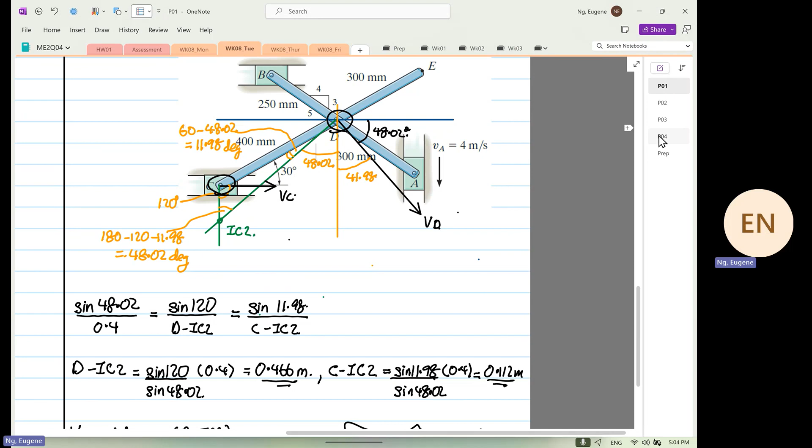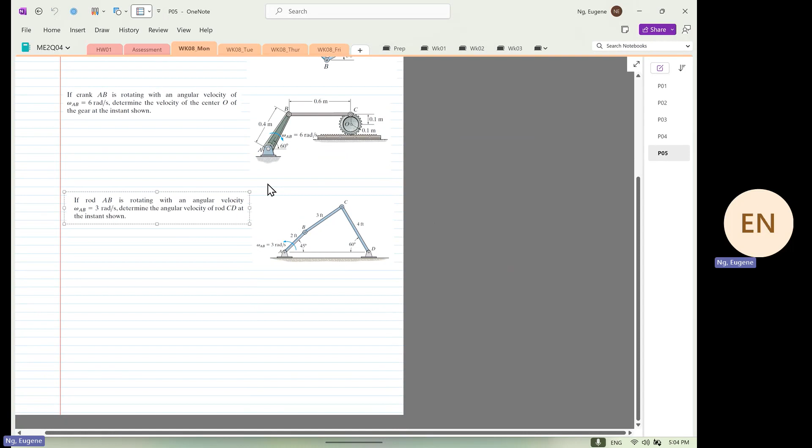Let's do another problem. This problem is one of the most difficult, always. Okay, you all agree I do difficult problems, not Mickey Mouse stuff? Difficult, we do difficult, yes. Then when you see, we finished vibration already, right? And we thought we were all going to die. We all finished vibration already. Okay, we are going to do this problem. This one, I'm not going to do Mickey Mouse stuff.

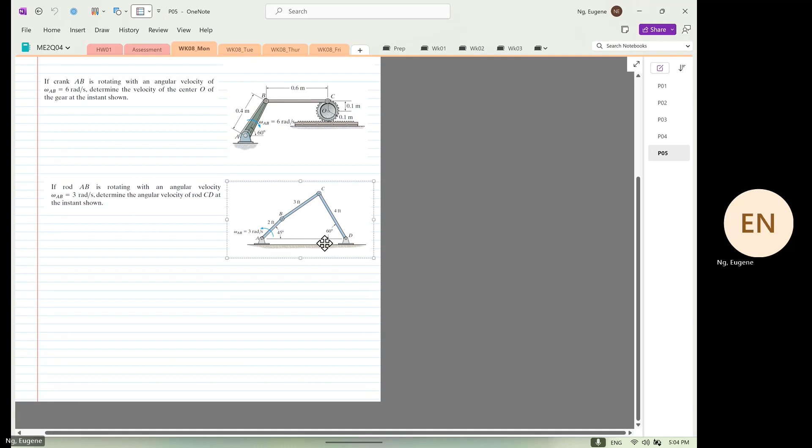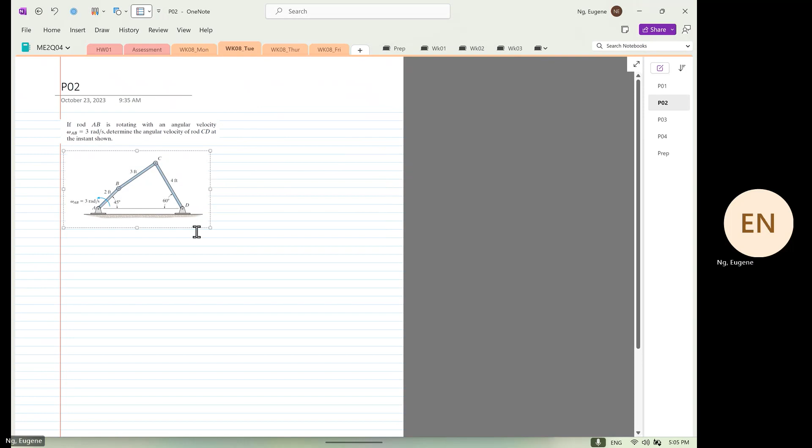We are going to do this problem over here. And this problem is in your homework. Okay, so let's see what we are given.

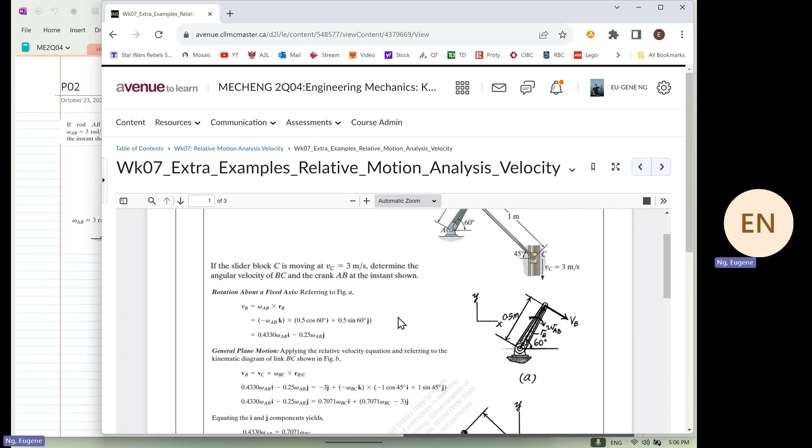I'll share with you guys a secret. The last time I taught this was 5 years ago. Whatever I teach you now, I cannot recall. But my every weekend from 6 to 12, I read the textbook. Are we clear? So now you're aware that I gave you some extra problems to look at, yes or no? If I were to go on Avenue to Learn, if you look at week 7, I post down here extra examples. This extra example is not for you to just see, this work example is for you to apply what I taught you, to see whether you can understand and give you some confidence. How can I do very complex problems? Because I need to have that confidence source. If I don't have confidence when I teach you, what will it become? You will have no confidence at all. So I'd like to thank you for your question yesterday. She wants to see how it worked the other way, I better show it, I think it's really important.

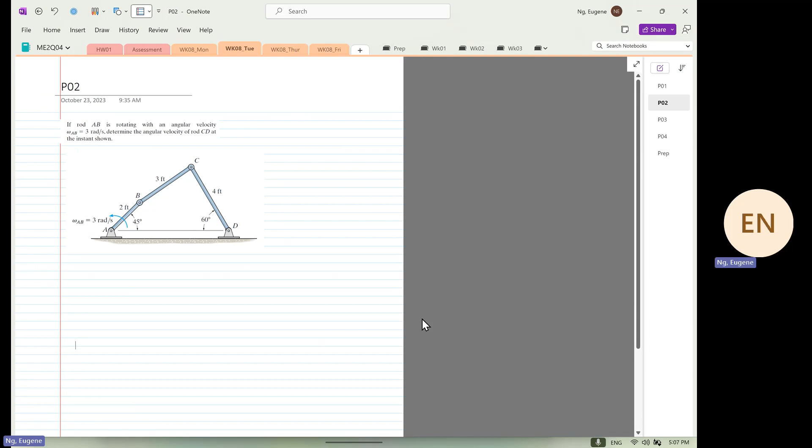Okay, now let's look at this problem now. This problem, yes.

Let me tell you what I did not tell you, I got nothing to hide. I'm the Kung Fu master that teaches you everything. If there's 15 steps, I'll teach you all 15. I'm not like the ancient Kung Fu master that teaches you only 14, because if I teach you all, you could kill me.

Right, okay. If the rod AB is rotating with an angular velocity omega AB equal to 3 radians per second, determine the angular velocity of the rod CD at the instant shown.

So for this case, in your homework, I want you all to use instantaneous center. For this case, I'm going to use instantaneous center. Yes, okay, I have to go through this.

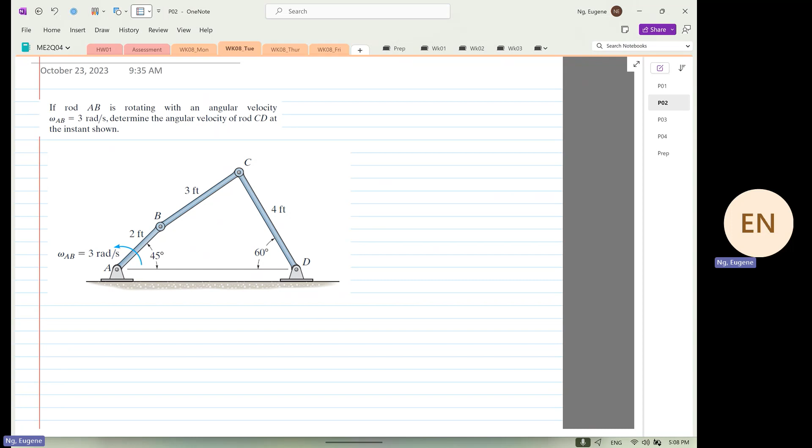So there are two orientations that we know. We have to find, so what we are going to find is omega CD.

So question for you, if point AB rotates clockwise, sorry, anti-clockwise, what do you think will happen to CD? Same direction. By the way, have you all learned this in 2D yet? Have you all learned linkages? Have you all learned this is called linkages? So when do you all learn linkages? What subject did you learn it in? So you all don't learn linkages at all in second year? Well, they learned it later in the semester. Oh, later. So thank you, so we know that omega CD will go this way, yes or no?

Right, this is our orientation. So with that, we have to sketch our VB and VC direction to determine the instantaneous center. Agree?

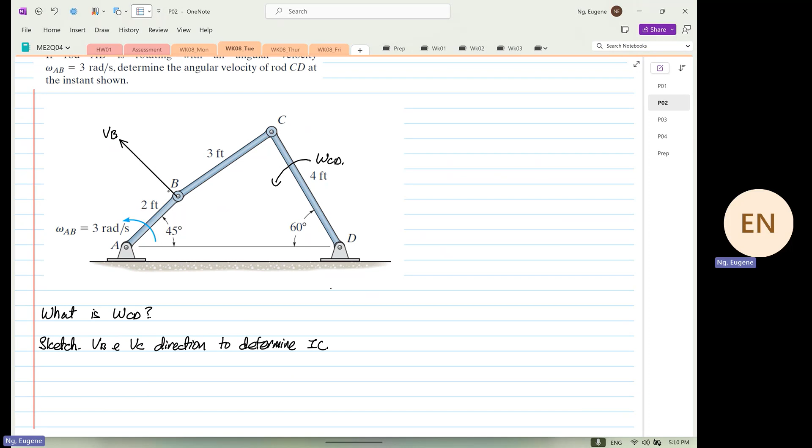This is 90 degrees. Then I'm going to project a green line. Whenever I project a green line, the purpose is to determine the orientation, the position of the instantaneous axis. So this is the line I'm going to project. The line to identify the instantaneous center, the line to draw, is perpendicular to what? VB.

Then we're going to find our VB, then our VC. Now VC, we know it has to be perpendicular. I'll try to sketch perpendicular first, using a blue line. Your sketching is important for this method.

Okay, then I'm going to, come on. Sorry. Hey, don't do that. Aye.

Then I'm going to rotate this by 90 degrees.

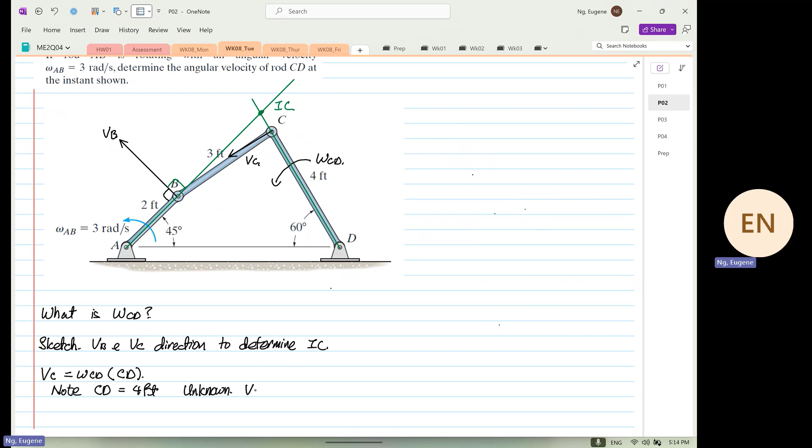So the unknown is your VC and your omega CD. Okay, so the next thing we want to do now, we know IC. So we know that this is our instantaneous center, right?

So we need to find VB first. Why find VB first is because of this. We know this is our instantaneous center.

Later on, if we find our BIC, let me say this is our BIC, and this distance over here is your CIC, then we can find the velocity at point C.

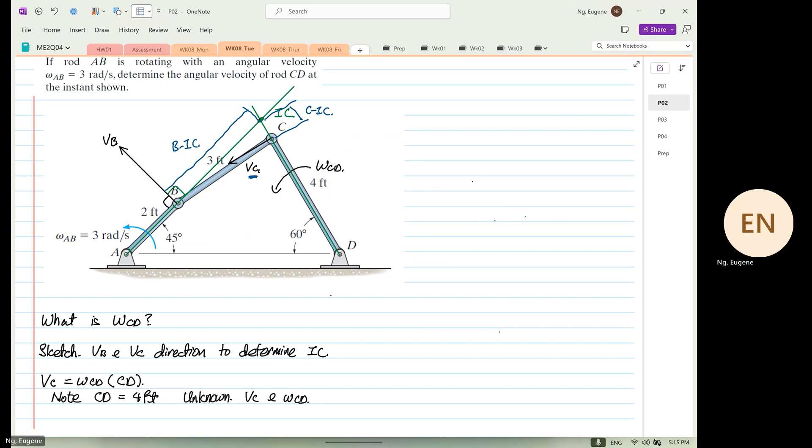Right? Why? Once we form that, we know that omega BIC is equal to omega CIC. Because we use those 3 points to plot our instantaneous center. Okay, so from here, we find our VB first.

So to find our VB, AB is equal to 2 feet. We don't need to convert. So the formula is omega AB multiplied by AB. This will be equal to 3 multiplied by 2, so this is equal to 6 feet per second.

Now there are a lot of angles that we don't know. I have not a clue what is this angle over here. We don't know what is this angle over here, and we also don't know what is this angle over here. Wait, do we know that one? We don't know. Is it 90? No, we don't know. So a lot of stuff we don't know. We have to find all these angles.

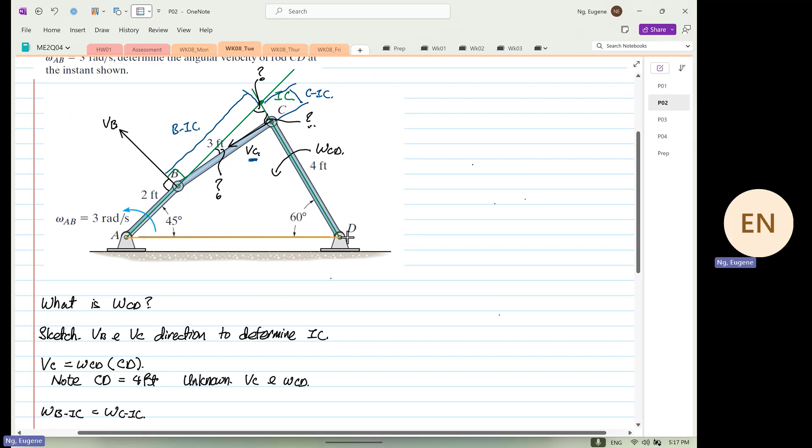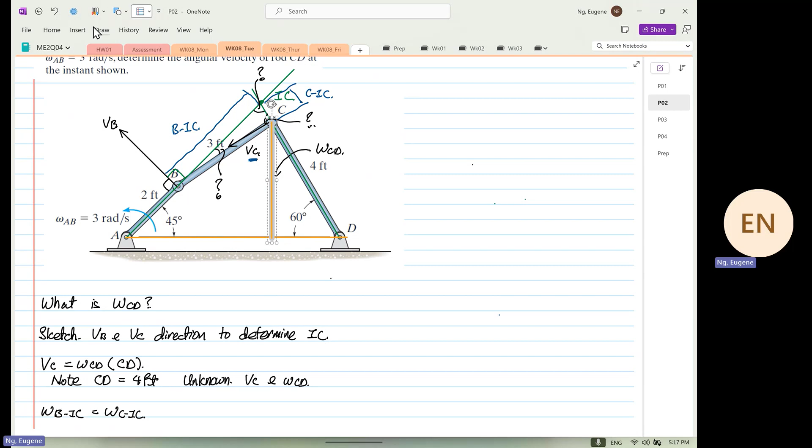Okay, now I'm going to make this look kind of messy, but it's not that bad. I'm going to draw an orange line on the horizontal. Let's see what we know, and we can draw the vertical line. Why I draw it this way is because those information we can find. I'm going to draw a horizontal line here, and then a line over here.

Okay, so I'm going to call this point our point E, this point our point F, and this point our point G. Okay, let me write better. I need all those points. Why do I need all those points? Because I need to associate them with all the angles.

So let's find the distance. This is just really straightforward math, I'll do it over here. So we know that AG, cos 45, will be equal to what? So cos 45 equals AG divided by 2, right? So therefore AG is equal to 2 multiplied by cos 45.

So 2 divided by cos 45 is equal to... okay, 2 cos 45, so cos 45 times 2 is 1.414. So by knowing that, we also know that BG is also equal to 1.414 feet.